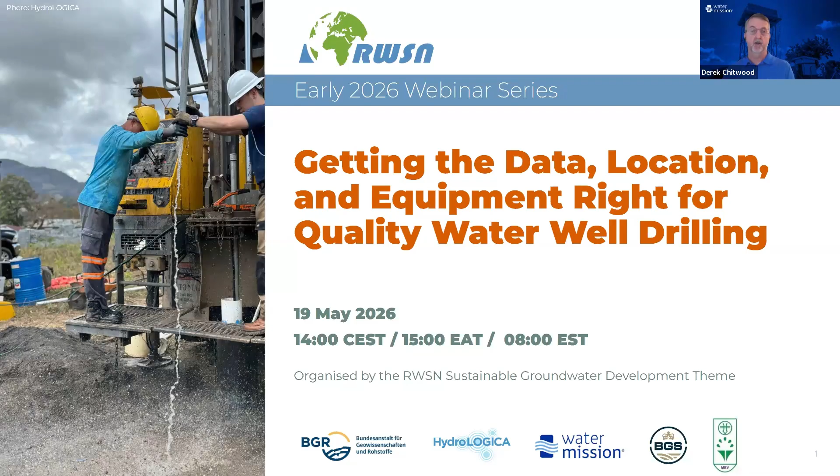In today's talk, we're going to be going over many of these details. The agenda today is that we're going to have opening remarks by Laura Holliday, and then two longer presentations, one by Dr. Martin Eduvie on borehole siting fundamentals, and then a second presentation by Brandon Stone entitled Choosing the Right Drilling Equipment. And then we're going to have some Q&A time, about 15 minutes of Q&A time before the closing remarks.

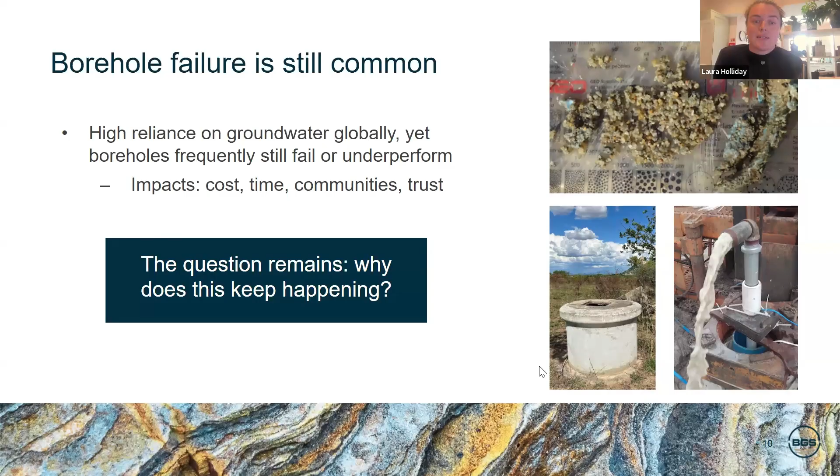In reality, borehole failure is not often caused by just one single issue. It's usually the result of multiple decisions made throughout the process. To start with, there's often a lack of data and understanding. Desk studies might be incomplete, and the data that is available might be low quality or misinterpreted. This means that decisions are being made without a clear understanding of the hydrogeological setting.

This then feeds through into improper siting and decision making, with locations often selected too quickly or based on limited information. In practice, siting should really combine multiple data sources. That might include field data collection, for example, geophysical surveying in more complex environments, but this doesn't always happen.

There's also challenges related to drilling and equipment, where equipment might not be suitable for the hydrogeological environment, and the quality of drilling equipment and borehole consumables can also vary quite significantly. At the same time, data collection during drilling might be poor or incomplete, and importantly, also borehole design isn't generally adapted to the site conditions, where the reality is that borehole design should be quite flexible, so we could be updating screened intervals based on what's actually encountered during the drilling process.

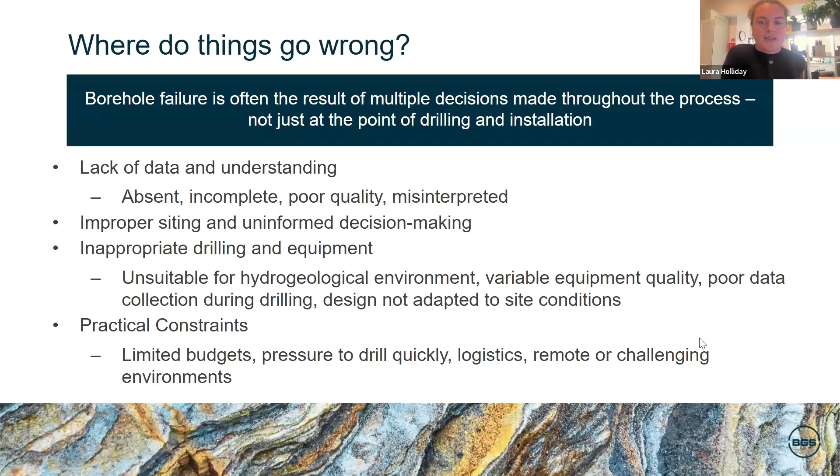Now we've looked at where things go wrong, we want to know what actually helps things to go right. The main message is fairly simple. Good siting, good design, and appropriate equipment leads to higher success rates and long-term sustainability.

Good siting and design means building a clear understanding of the hydrogeological context, using both desk studies and collecting new field data, and then combining these multiple sources of information. But it also means continuing to collect and use data during drilling and ensuring that the borehole design is site-specific and adaptable based on what's actually being encountered.

At the same time, appropriate equipment is not just about the drill rig, it includes the full construction process. This means using the right drilling method and suitable and well-maintained equipment to start with, but it also means selecting appropriate and good quality materials for installation within the borehole. So this might be the casing, the screens, the gravel packs, and even choosing the right pump.

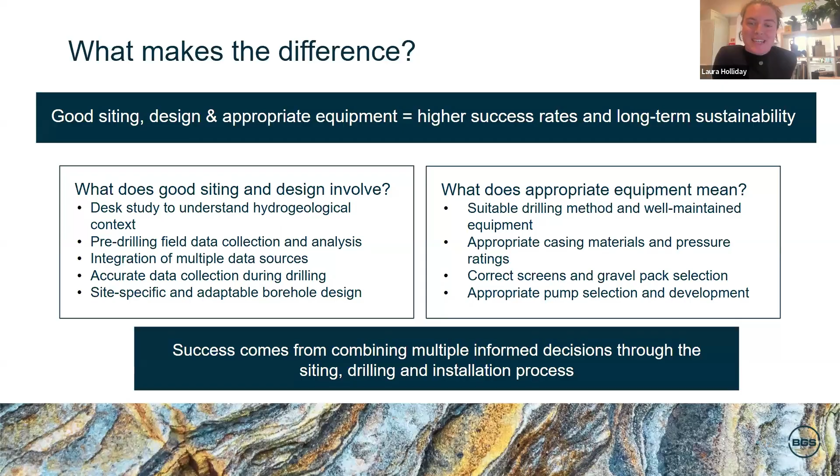So overall, we can see that success comes from combining multiple informed decisions throughout the siting, drilling, and installation process. Thank you for your time, and I will now hand you back over to Derek.

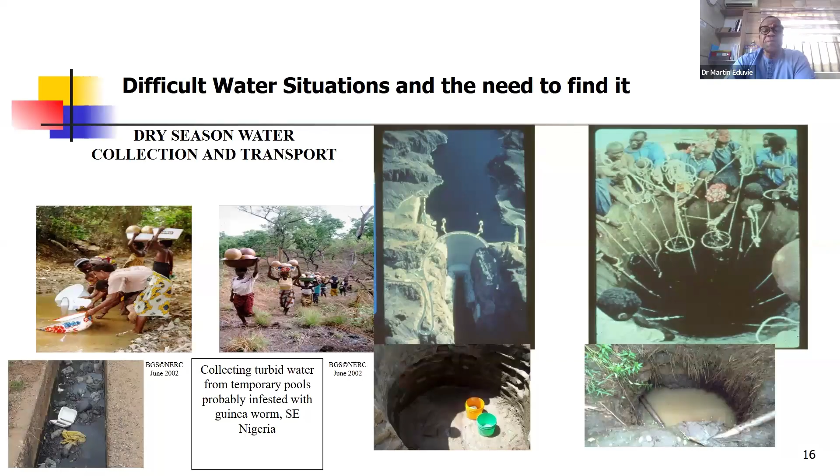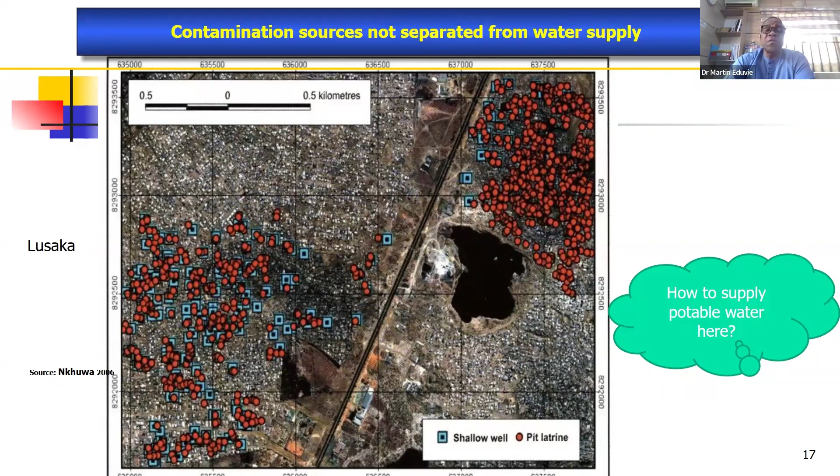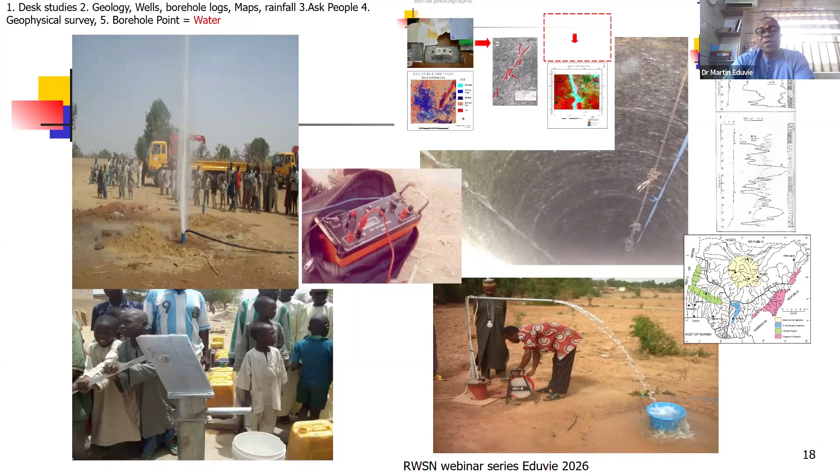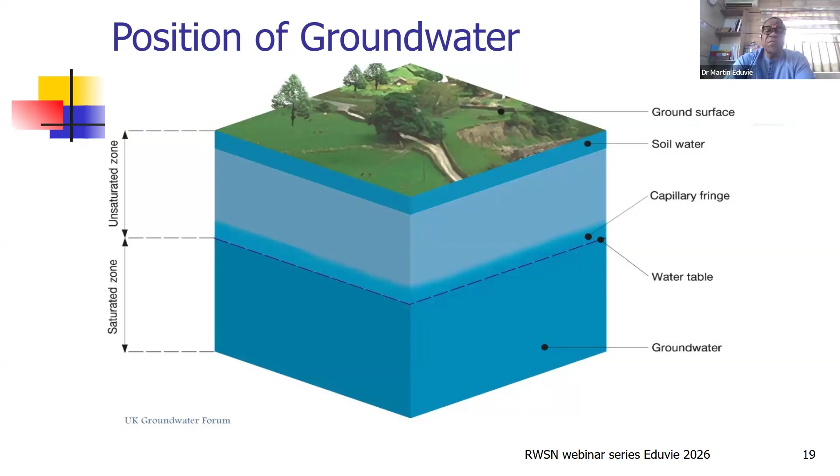What are we looking for? This is the position of groundwater. At the top of the surface there, you have everything that happens - your buildings, your recreational services, and all your development issues. Then just below that, you have the soil water that gives you the unsaturated zone until you meet the static water level before you get to the saturation after the water level.

The basic issues that are very important, especially in locating good areas for siting, is the geology itself, which I refer to as the main housing unit. Generally, you have the basement complex and the sedimentary environment. Most of the aquifers, which are normally the geological formations that can store and transmit this very scarce commodity, have, for example, fissures and cracks within the Precambrian basement complex. You also have some pore spaces within the sedimentary environment and a little bit of loose sand that are normally associated in flood plain areas, sometimes referred to as fadama.

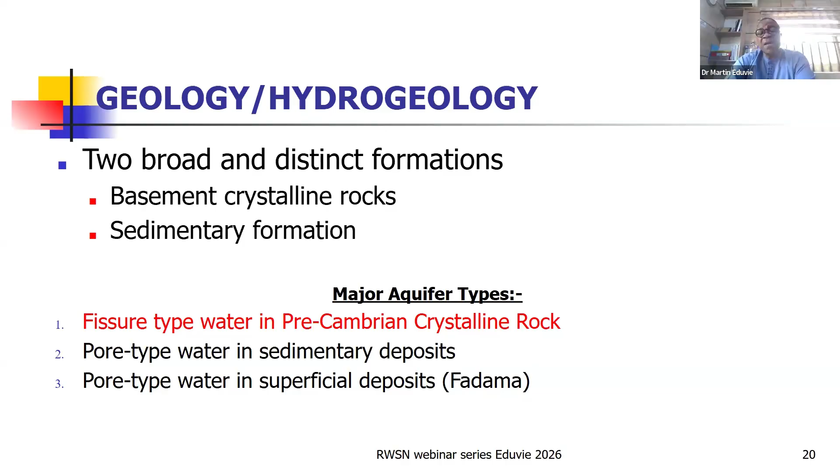Geologically speaking, the first one gives the unconsolidated pore spaces, followed by the fissured aquifers with the consolidated rocks. They are quite important, except there are fractures. Then, of course, you have what we call the karst aquifers. These are mainly silicified, calcite, for example in terms of limestone and, of course, dolomites - the calcium and, of course, the magnesium equivalent. And when there are fractures within this geological diversity, you have good aquifers.

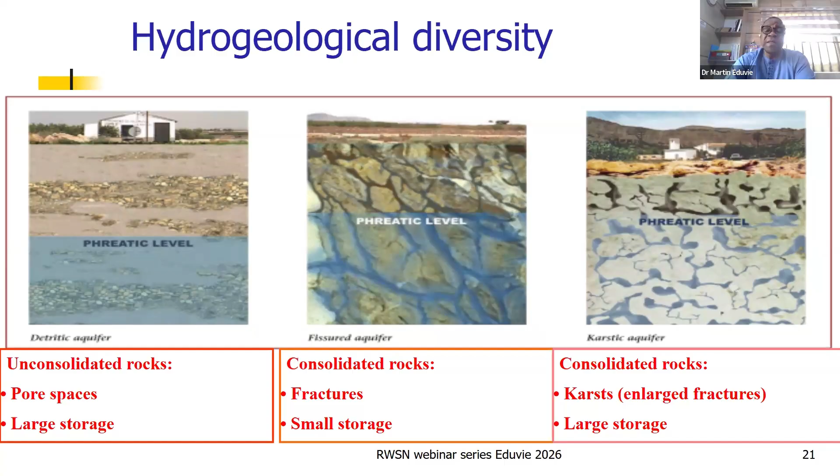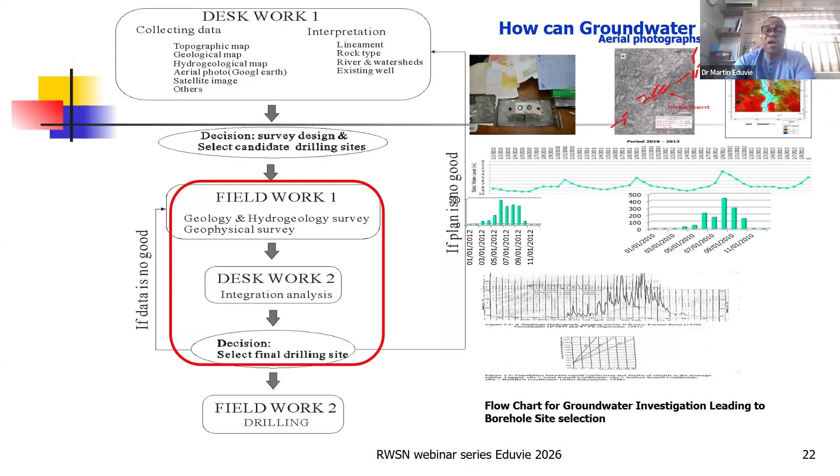Generally speaking, I've tried as much as possible to give the whole journey in a very good slide here. The first one talks about the desk study and, of course, the areas that are quite important, like the photo maps, the satellite, and, of course, most of the fractures. From there, you're moving into the field aspect of it that identifies streams, identifies rivers, identifies most of the aquifer itself, including hydrographs and, of course, rainfall data that can be used to interpret this, then followed up by geophysical interpretation. Right in the field, when you notice that there is good prospect for it, then you can go on to do the siting. But if you are not convinced, you might have to go back and do more studies.

The geological environment is very important. Giving an example of a geological environment in Nigeria, where you have the sedimentary environment, the basement complex, and of course the basement complex is mainly the granitic rock - for example the igneous and probably the metamorphic rocks. All these are subject to an increase in terms of fractures and cracks that we're able to kind of identify areas where there are fractures.

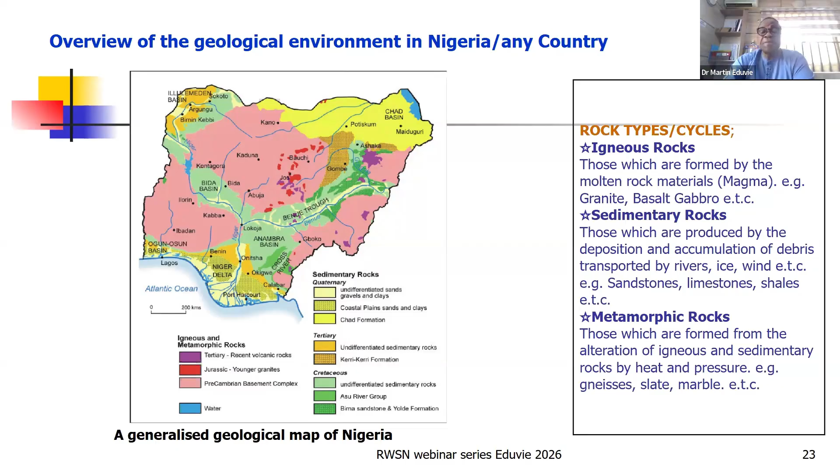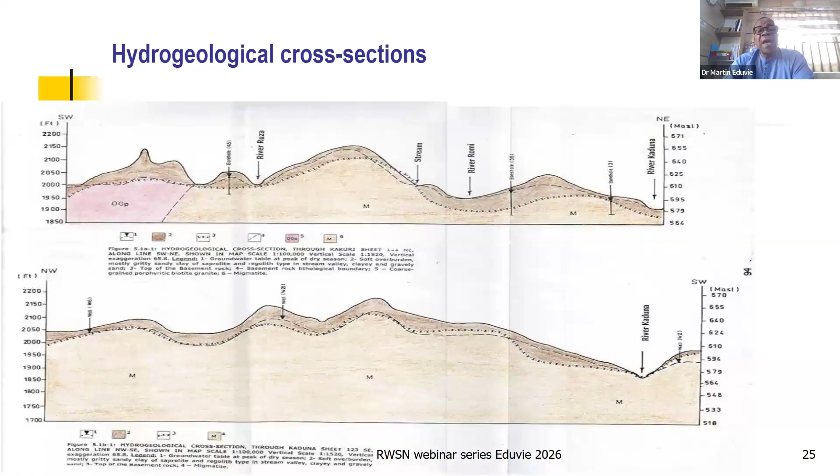Sometimes the geological map is looked at as not very important, but these are direct evidence that can give you the direction of flow of most of the rock unit. Next, you can go into the cross-sectional areas, which are very important because they directly identify areas that are fractured and areas without fractures. That's why it's important to have a good look at the hydrogeological section so we can identify areas to drill.

Now, the geophysical aspect is very important, and has always been very important. Having done your normal desk study, reconnaissance and field study, the next important aspect is to do the geophysics. This is the surface geophysics. Over the years, the electrical resistivity method, consisting mainly of constant separation traversing and vertical electrical sounding, has proven to be very reliable. You can use it to save cost - for example, you don't need to use electromagnetic methods. Instead, you can use horizontal profiling to do the same job.

I tried as much as possible to explain that when you have two electrodes driven into the ground, measuring the resistance, the difference in terms of apparent resistivity value is what gives you the value that helps identify areas to drill. For example, if you have a topography where one point is very high and one is very low, in between you can decide to have three vertical electrical soundings - at the highest point, the middle, and the low point. From there, you can use those values as your constant separation traversing to eliminate areas that are not quite productive.

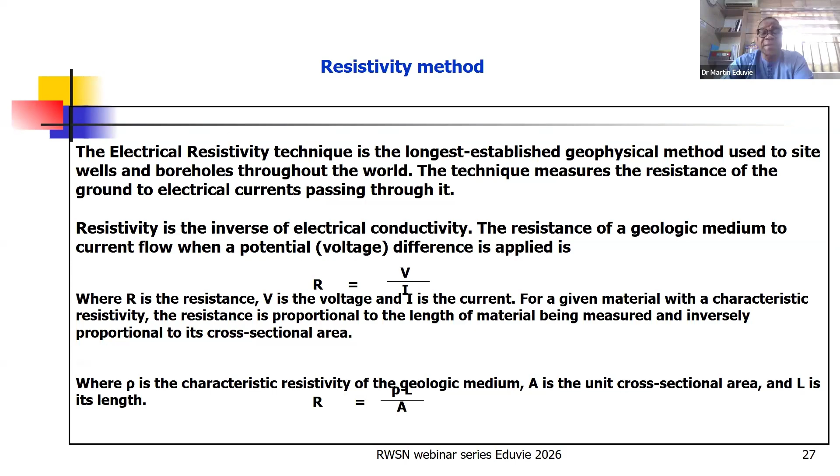These are just giving you the various configurations that we're able to use.

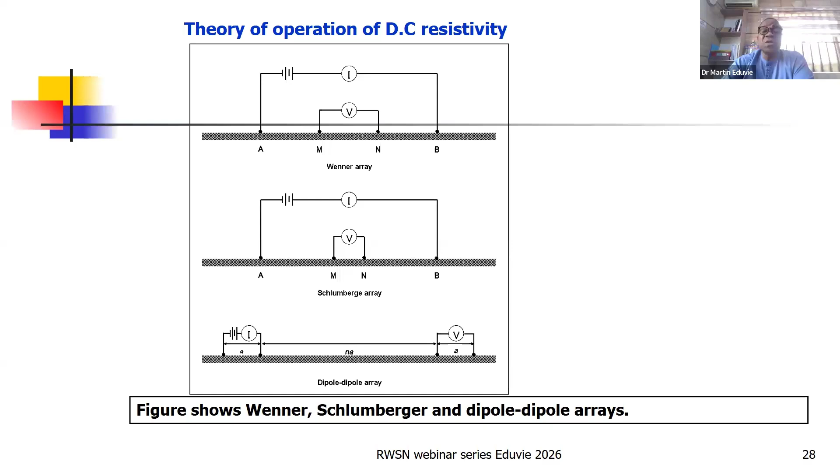Now, when you have the current on C1 and the potentials P1 and P2 kept constant, we use that as the Wenner array. This is very nice for constant separation traversing. While the Schlumberger array is used for vertical electrical sounding - the more you increase the length of AB over 2, the more result you get in terms of what is happening beneath the soil.

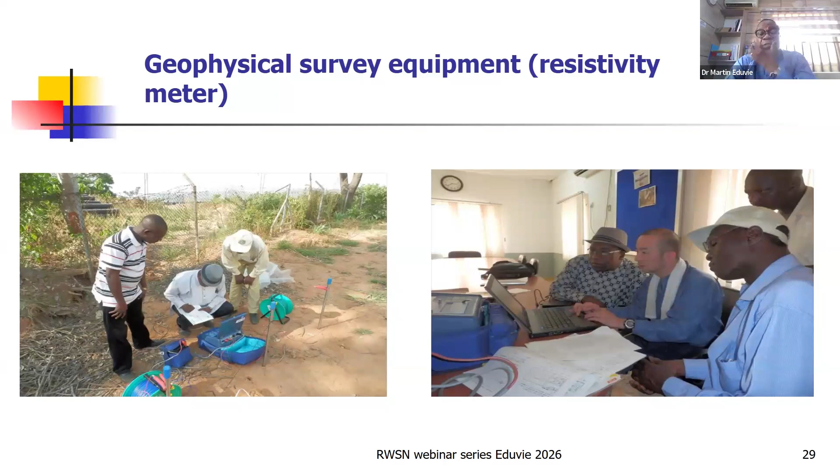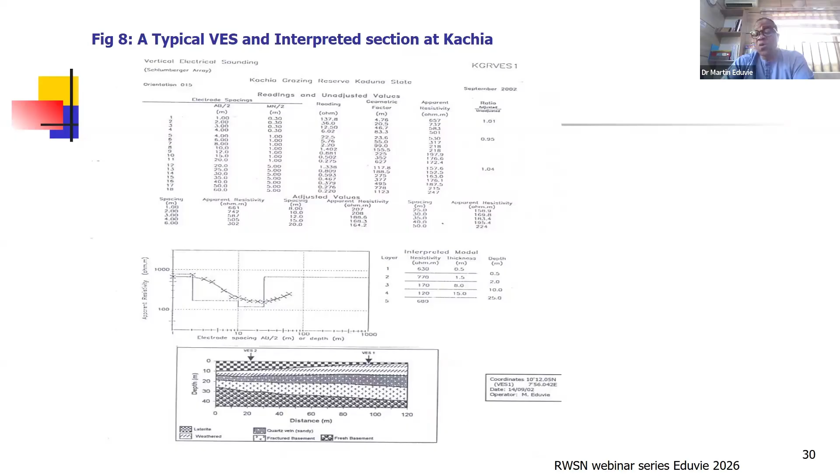After the modeling, for example, this is a typical H-type curve where the top of the curve is quite high - we refer to this as the upper resistivity, which is high because of the dry nature of the topsoil. As you keep drilling down, it becomes a bit moist, reducing the resistivity because it becomes more conductive, until you hit the basement, where it starts moving up again. Depending on the nature of the inclination as you move along, the percentage of inclination tells you whether there are fractures present or not within the area.

Now, this gives you the field interpretation of the resistivity in relation to the drilling you are supposed to do. Basically, this is a typical basement complex where the topsoil is quite dry with a lot of laterite, then it becomes sandy clay until you get to the transition zone, which is quite important in terms of aquifer, until you meet the basement. Only the basement will be useful for water if it is fractured.

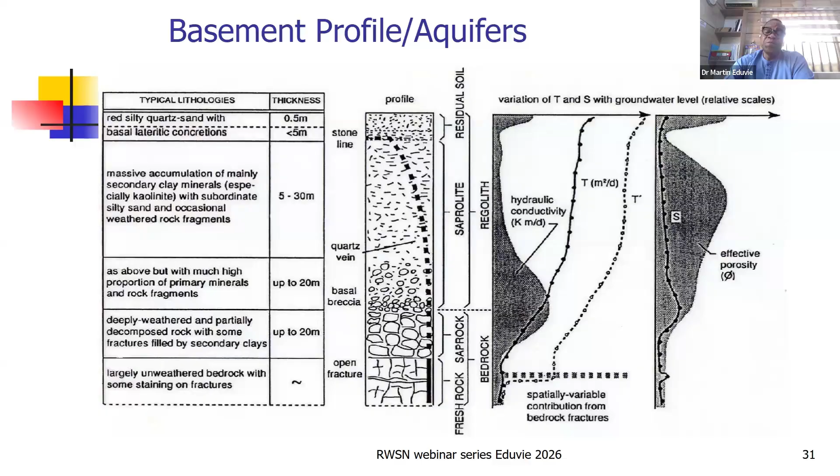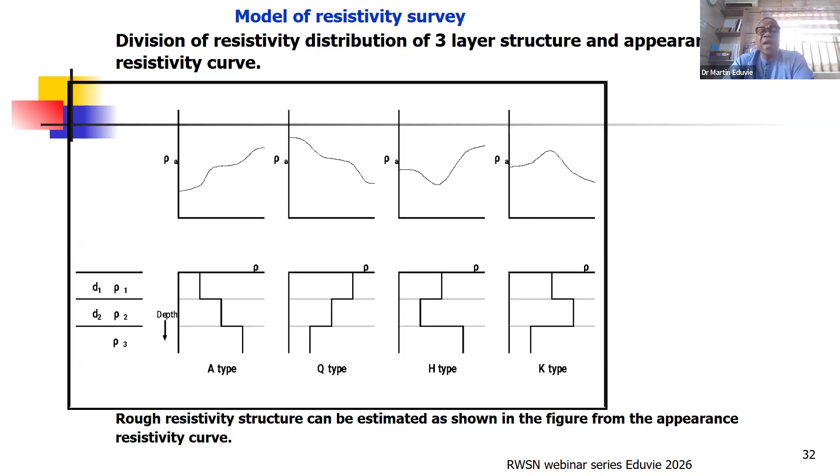This gives you a typical example of the most probable resistivity curves you are supposed to have - the A type, the Q type, the H type, and the K type. Most of the time, the topsoil here is quite high, as I mentioned, because the uppermost resistivity when heated by the sun becomes dry and very resistant, so the values are likely to be high. When it comes low, it means you have something like clay, until you hit the basement before it rises again. This gives you a typical example of the most likely curves you are supposed to encounter in those areas, and this can be very handy in terms of your interpretation.

This is also the modeling. For example, if you have quite a lot of different scenarios beneath the soil, you can use that interpreting in various ways. For example, the constant separation traverse in the resistivity Wenner array was used, and it can directly identify that in terms of the high value for resistivity, that's where you have the peak.

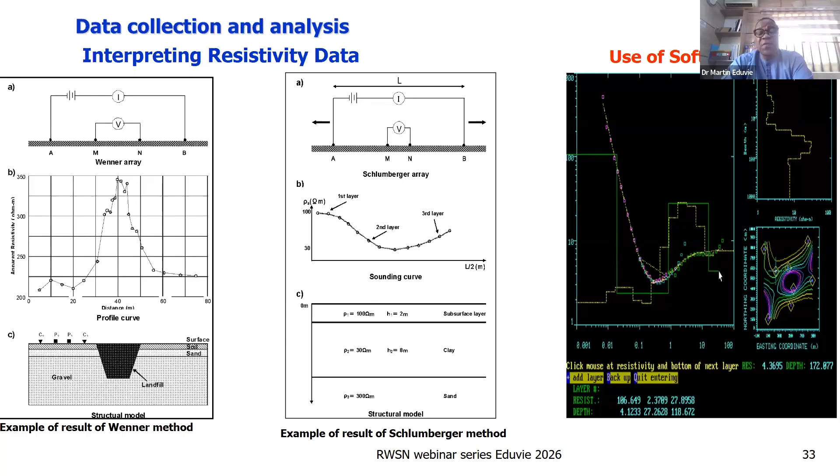The other gives you a typical example within the basement of an H-type curve, where the topsoil is quite high, and with a little bit of moisture, clay for example, it lowers the resistivity before it becomes high again. This gives you a type of modeling you can use in conjunction with the various logs you have during your desk studies. Next slide.

I've done quite a lot of series of work within this. In most of the works you have here, we are going to have about 4 more scenarios: the dry basement, for example, which is quite clear at the top, the weathered zone and the fresh. Sometimes the topsoil can also be brecciated, or sometimes with a lot of laterite, then you have the weathered zone, then the fresh.

Or you could have a very clean overburden, sometimes mixed up with a lot of boulders, then weathered basement, for example, and of course fresh basement with a lot of fractures.

The last series is what I refer to as the false basement. Sometimes you have the top resistance, it becomes a little bit weathered, and you think you're already in the basement, the hard rock. Then by the time you case the temporary casing and decide to introduce your hammer, you find that it grinds it down and looks as if you are back to the weathered zone of the basement complex.

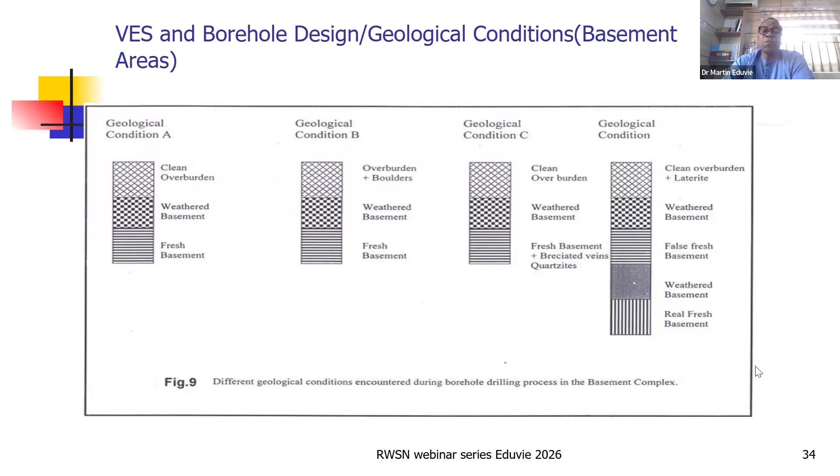This is giving you a false basement, what I call the false basement. So you need to return and remove all those temporary casings and drill down again before you can get a hard basement. This is very important. This has resulted in a lot of abandoned wells, abandoned boreholes in most instances. Next slide.

Now this gives you an example of different interpretations of vertical electrical sounding with logs, and gives you some models to correlate what you have in the vertical electrical sounding with how they correlate with the drilling that you have. Next slide.

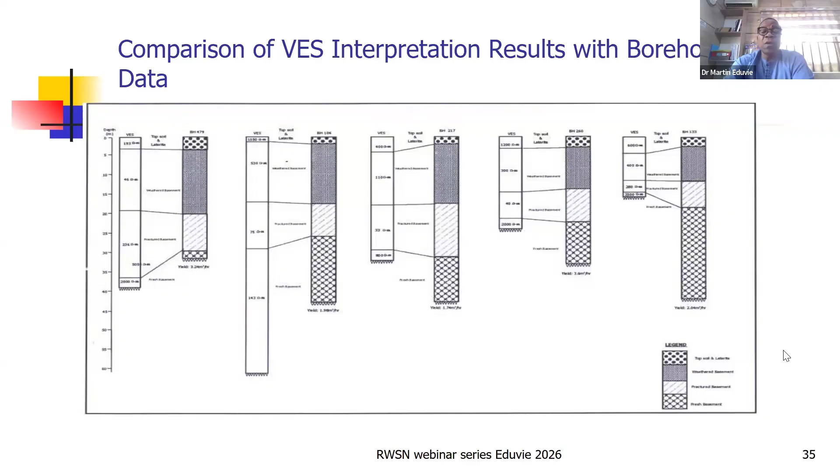This also gives you a typical summary of what you have. So if you have, for example, the desk studies, your reconnaissance added with the resistivity value, of course with good drilling, that gives you the result of a good aquifer system and a good borehole. Next slide.

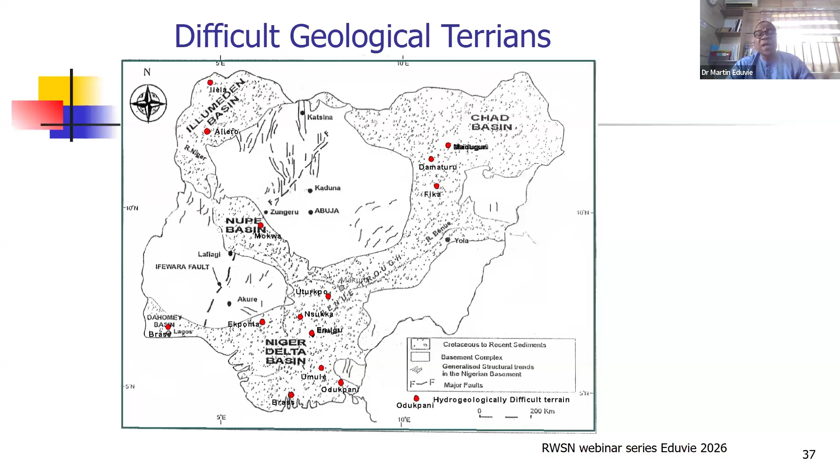Sometimes it's good for you to have an idea of the difficult areas, so that anytime you are planning for a good site to bore, it gives you an idea so that most of your reconnaissance and fieldwork will be based on the areas you are working on. This gives a kind of advantage over others, especially if you do not have much data. Next slide.

Now, what are the basic reasons when we try to summarize this? Less attention and low investment is normally given to the study and investigation stage. This has resulted in very unproductive wells, geological and hydrogeological difficult areas, as I've just mentioned in the last slide, and a lack of hydrogeological maps, satellite images, and software to be able to interpret this.

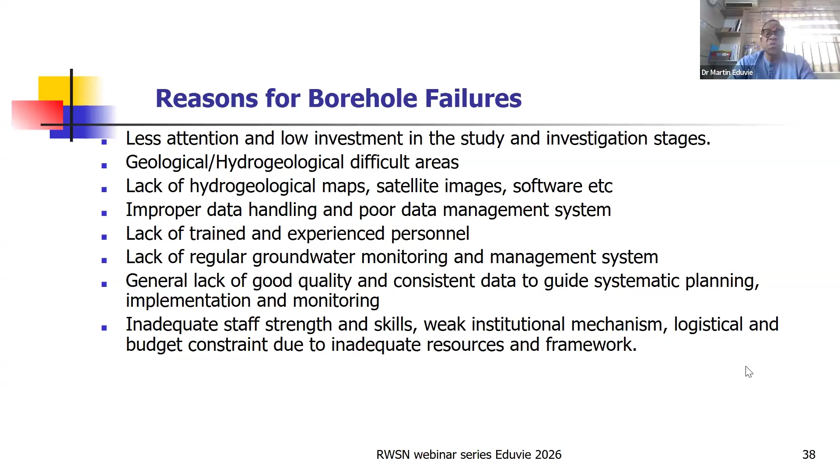There's improper data handling because people don't have good skills, experienced field people that can help you interpret data. There's a lack of regular groundwater monitoring and management systems, and generally bad quality of water, and even in terms of the data that you have. This will normally help you if you have good quality data in planning, implementation, and monitoring. Of course, institutional mechanisms are very important for you to be able to do all this. Next slide.

Conclusion and recommendations. For you to have an excellent result, there's a need to understand groundwater in terms of the exploration, which is the general ones I've given to you in terms of desk study, reconnaissance, and fieldwork. Then the method of the exploration and the management.

Conduct good geological and hydrogeological studies, both within surface investigations and also the best site for the survey, drill pilot hole, especially for very good projects that involve a lot of boreholes. And of course, you drill and do a lot of geophysical logging to tie most of what you have at the surface with what you're having. This will give you more confidence in terms of location of the groundwater system.

Using, for example, the electric logging, which is the spontaneous potential and the point resistivity, using caliper to be able to notice where you have cracks or loose sand, and of course the gamma log that differentiates between clay and sandy formation.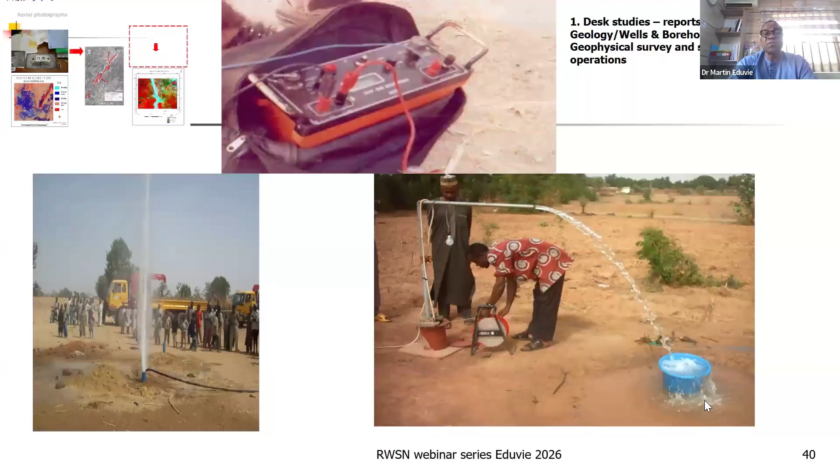At the end of the day, sometimes you are sitting or standing on a solution, but because you have not taken your time to find out what it is in that place, what are the things that are required, what are the tools for you to be able to do it. It's normally important for you to find it so that you can use it to achieve your result.

Thank you very much for listening. I hope that if you endeavor to adhere strictly to this, you should be able to have a good well at the end of the day. Thank you very much.

Thank you so much, Dr. Eduvie. Excellent. Really appreciate the talk and for allowing us to understand that siting is very complicated. It's not just one point of data and then we move on, but it's really a synthesis of so much work that has to go together.

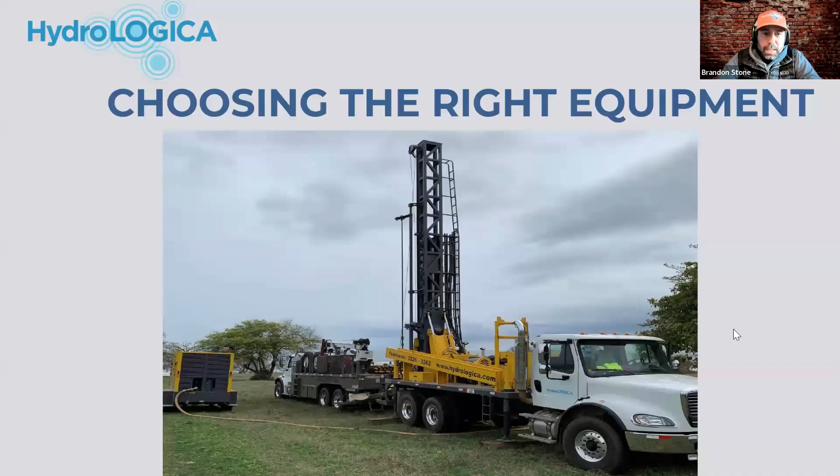Hey, good morning, good afternoon, good evening everybody. Like Derek said, we provide training and consulting across Latin America and Africa, and we also have a full drilling operation in Nicaragua, so hopefully we're talking from a position of experience. This is some of the equipment we've got down in Nicaragua. This morning I'm going to talk to you guys about how to choose the right equipment.

Matching equipment to the geological conditions is super important. In geology, as I'm sure Dr. Martin can tell you, it gets really complicated. From a drilling perspective, it gets a lot easier - we've got hard rocks and soft rocks, swelling clays too, but ultimately the geology dictates our drilling method.

Our borehole diameter plays a huge role in the type of tooling and the size of equipment that we need, as well as the depth of the borehole. We can gain a lot of that information from a proper desk study and from a proper hydrogeological assessment.

If we just show up to a location with no previous studies, no information, or previous drilling experience there, we're not really sure what's down below us, and understanding what drilling methodology we'd like to use can be nebulous. So this information is important, and when you're contracting out drillers, you want to send out all of the studies and information you have so those drillers can make an informed decision as to whether or not they're qualified to drill that well.

The specifications for the borehole and all of those studies should be made available to the potential contractors.

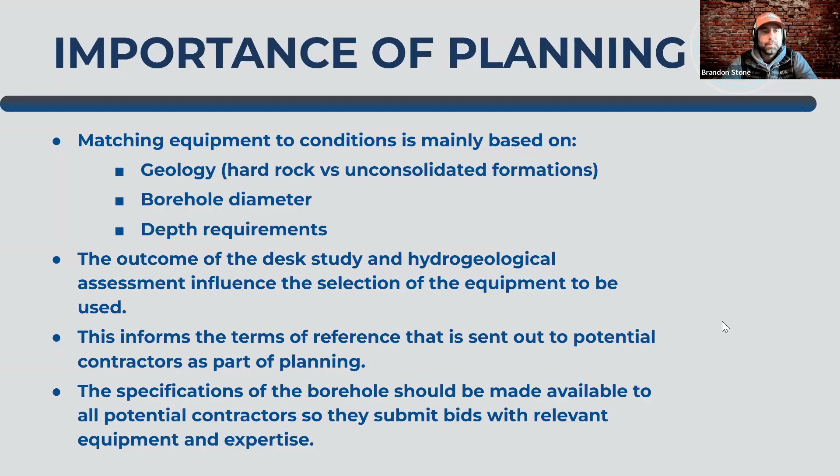And in each one of those different activities, you need qualified and trained personnel, and they need to have the necessary and correct equipment. Then you need to have a supply chain that supports the spare parts, materials, and supplies for that. Today we're going to talk about the drilling the well part and the necessary equipment related to that.

It's worth noting that you could have the best equipment in the world, brand new equipment, but if you don't have a competent driller operating that equipment, it's almost completely useless. I'd rather have an older drill rig with a competent driller any day of the week rather than a brand new shiny drill rig. We're actually dealing with that situation right now.

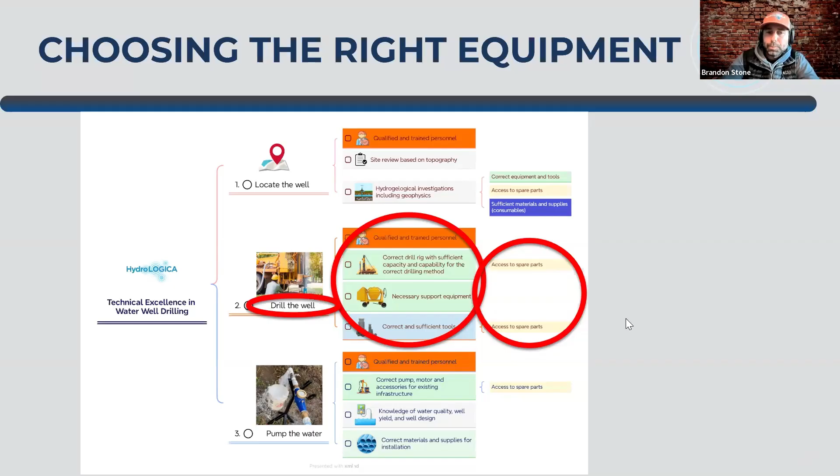There are different equipment, and that specific equipment is specific for different drilling contexts. I'm just going to touch on the most common drilling methodologies: there's mud rotary, air rotary which also includes downhole hammers, it can include foam drilling, and then the oldest drilling method out there are cable tools, which is percussion drilling. In some parts of the world, manual drilling is also a viable option.

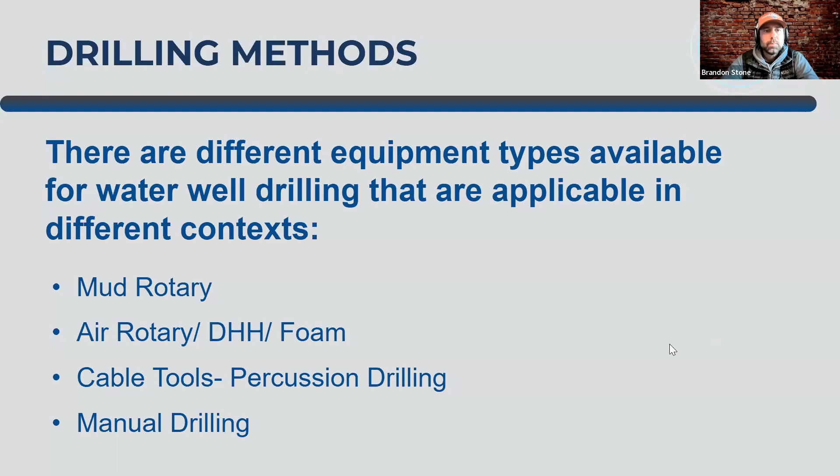One thing we want to do before we contract a driller is assess the driller's ability to drill that borehole. So when we put out a bid for a well and get bids back from drilling contractors, we want to go and review their equipment and confirm that it has the capacity to do what we need for that specific borehole. We want to consider the capacities not only of the main equipment, but also the ancillary equipment - the drill rigs, the compressors, and the mud pumps.

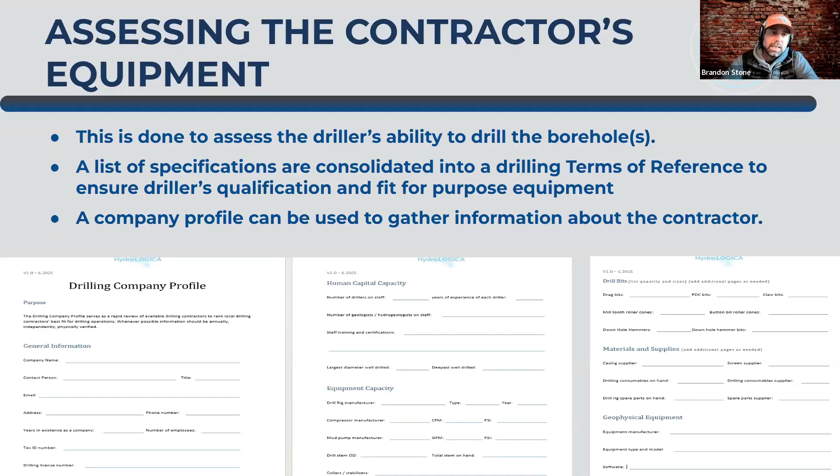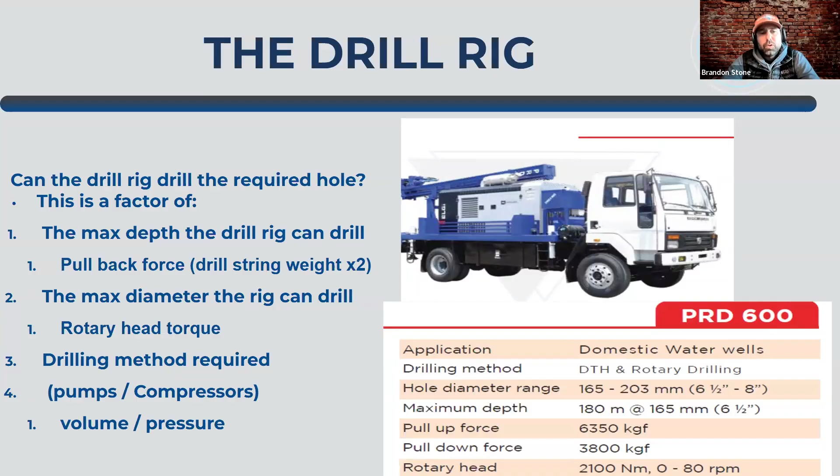So the drill rig itself, most rigs manufactured by a reputable driller will have published capacities. Most drill rigs' capacity specifically will include the pullback force, or the capacity to pull things out of the hole, which is directly related to how deep that drill rig can drill. And then they'll talk about the rotary head torque, which is directly related to the drill rig's capacity to drill larger diameter holes.

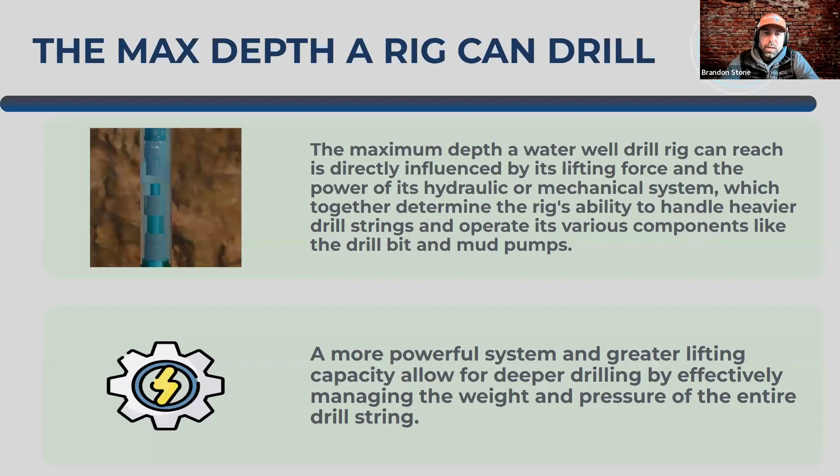So people often ask, how deep can that drill rig drill? The answer depends on how much pullback force it has. That force is related to the hydraulic capacity of the drill rig to move up and down, but more specifically, the capacity to pull weight out of that hole. That weight ultimately is the entire drill string, drill collars sometimes, and then the drill bits. You never want to max out a drill rig's pullback capacity. Usually you want to use about 50% of it at total depth.

The diameter of the well is in part directly related to the drill rig's torque, which is the top head torque, or table rig torque. The drill rig's capacity to turn that drill bit and the entire drill string is related to that top head torque. So the more torque it has, the larger bit it can turn successfully, and by extension, a larger diameter well it can drill.

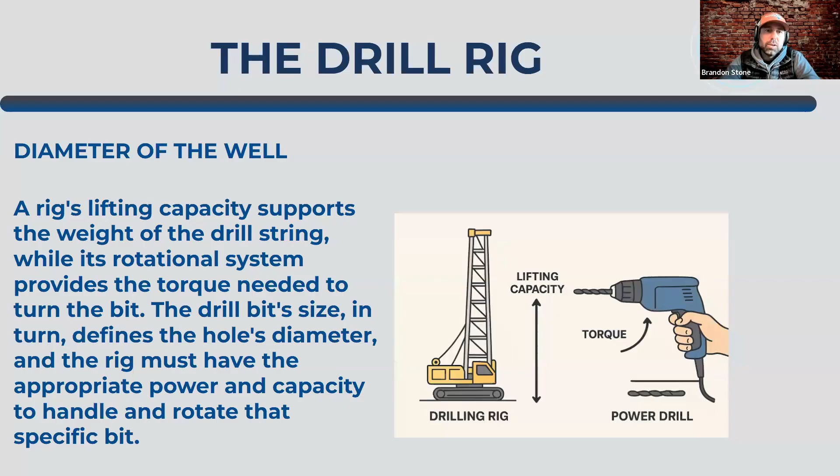And again, all of this can be found either from the drill rig manufacturer, or oftentimes it's printed right on a plate on the drill rig, and we will go out and actually look at that and verify those specifications.

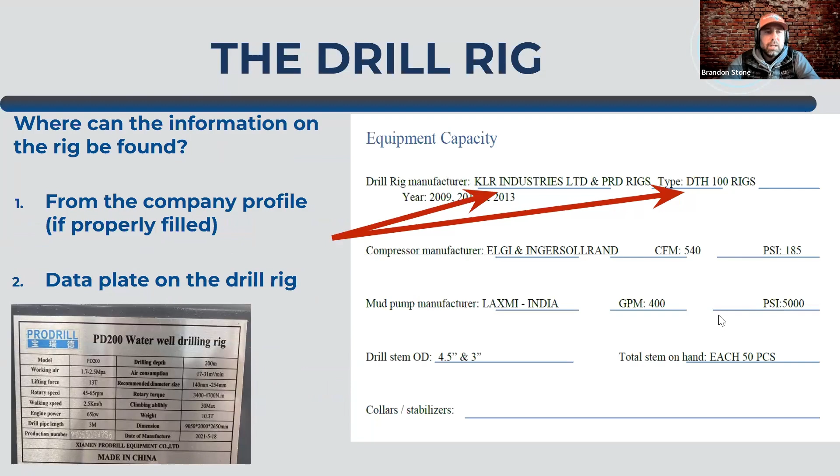There are different rig types, and we talked about those briefly. But if we want to mud drill, we want to make sure we have a drill rig that has a mud pump, or that they bring on an on-site mud pump. The same is true with an air compressor if we want to drill air.

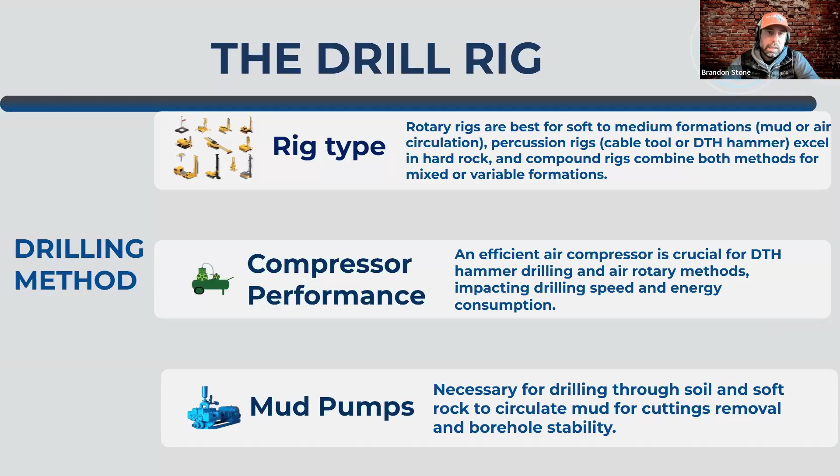Air compressors are obviously for air drilling, but just like drill rigs, they come in a lot of different sizes. Both air compressors and mud pumps, we want to think about volume and pressure. Can the compressor lift the cuttings out of the annular space all the way to the surface? The larger diameter hole we drill, the more air volume we need to push all of those cuttings up. And the pressure the compressor exerts is specifically related to hammers. When we're air drilling with hammers, they need a specific amount of pressure to actuate the pistons and function the hammers. As we drill deeper, we need more pressure to overcome friction losses as we come up the hole.

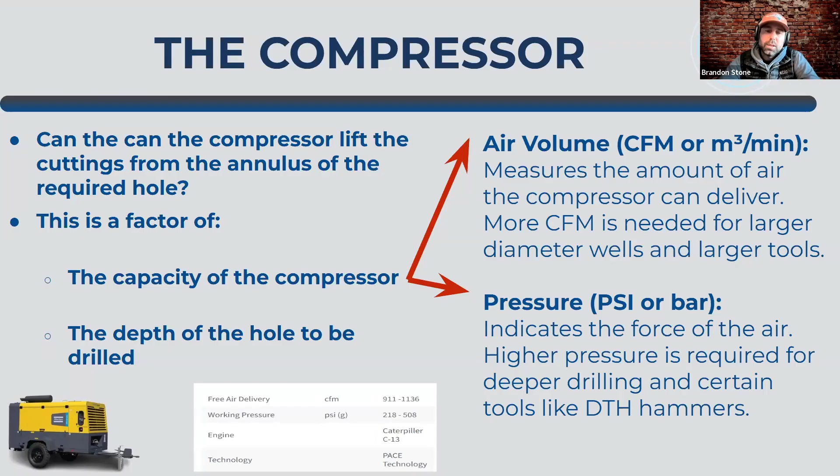I'll spare you guys the math on that, but you can find it out. We like to recommend an industry best practice of a minimum of 3,000 feet per minute annular velocity for dry air drilling. That converts down to different CFMs at different hole diameters. A lot of you guys drill 8-inch holes - you're going to need about a 950 CFM compressor to drill that safely. A lot of people drill larger diameter holes with undersized compressors, and you'll get this: 'hey, the hole's collapsing.' No, the hole's not collapsing - there's not sufficient volume to push all of those cuttings out of the hole. So as the holes get bigger, we need a lot more air, or we can turn to foam drilling, which is not something we're going to talk about here, but there are methodologies for doing that. The big takeaway here is we want you guys to understand that the larger diameter you have, the bigger compressor you need.

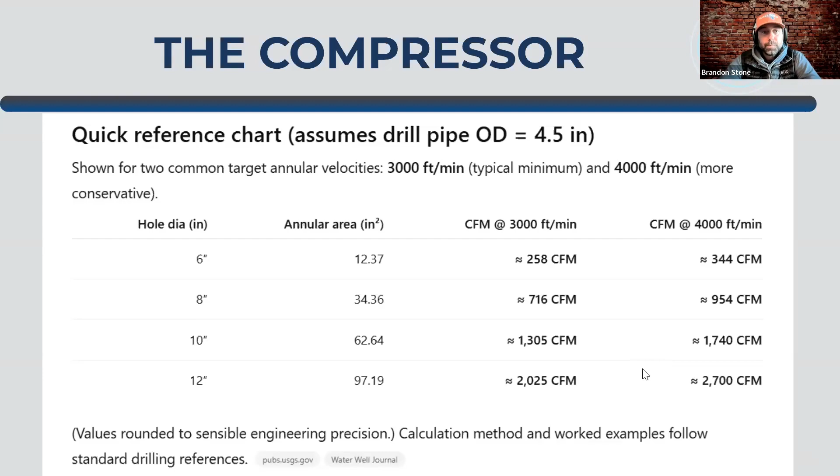A similar sizing is true for mud pumps and mud drilling. The question is, can the mud pump supply the required volume to get the cuttings out of the hole? Again, this is a matter of volume and pressure. All mud pumps should have both a volume and a pressure rating.

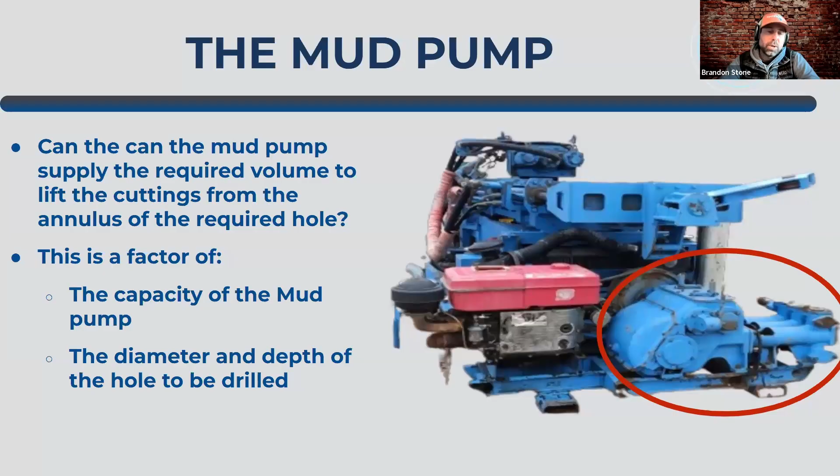So just like a compressor, the volume is directly related to the diameter of the well. Large diameter wells, certainly 14 inches and up, are typically drilled with mud because it's not economically feasible to put that many compressors in parallel.

Typically large diameter holes are drilled with centrifugal mud pumps, and deep wells are drilled with piston mud pumps. That's because centrifugal mud pumps can generate high volumes, and piston mud pumps can generate high pressures. So the larger the diameter of the hole is, the larger the mud pump we want, so that we can lift all of those cuttings and that entire column of mud out of the hole.

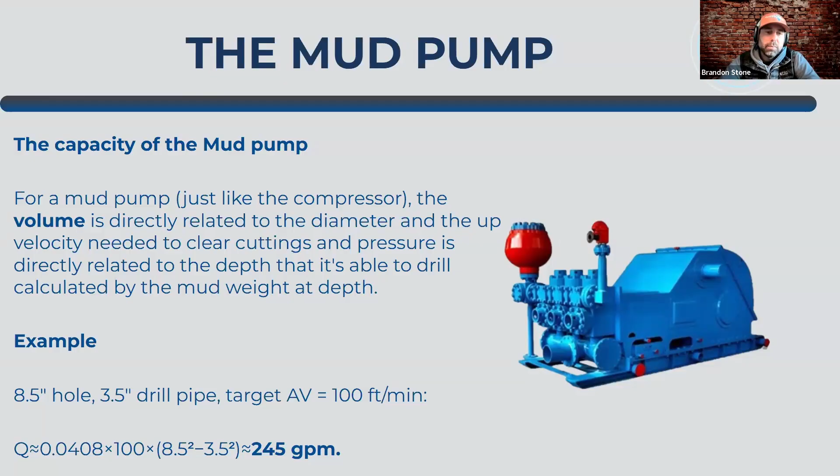The deeper we go, we're going to need more pressure, and that pressure is directly related to being able to push up all of the cuttings and all of that mud out of the hole.

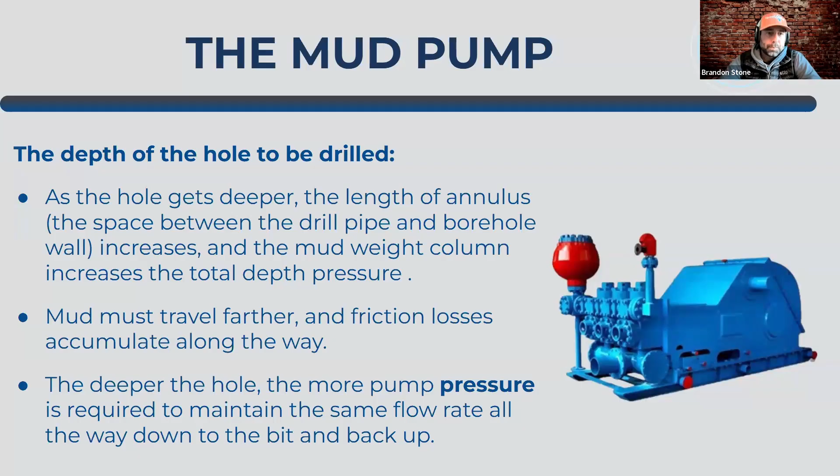This is a reality in all the countries we work in: adapting in constrained environments. In a perfect world, we would have all of the different equipment options and drilling methodology options, but that's not always true. So we're always faced by constraints, and the budget is below the cost of using the ideal equipment. You need to make sure your budget is appropriate for the type of well you're wanting to drill and the geological environment you're trying to drill in.

You need to determine whether or not the required equipment is available in your context and in your specific country. And then oftentimes we want to try to validate the experience and expertise of the drilling company and the drillers with that specific drilling methodology. Unfortunately, oftentimes the ideal equipment is not always available in the countries that we're working with.

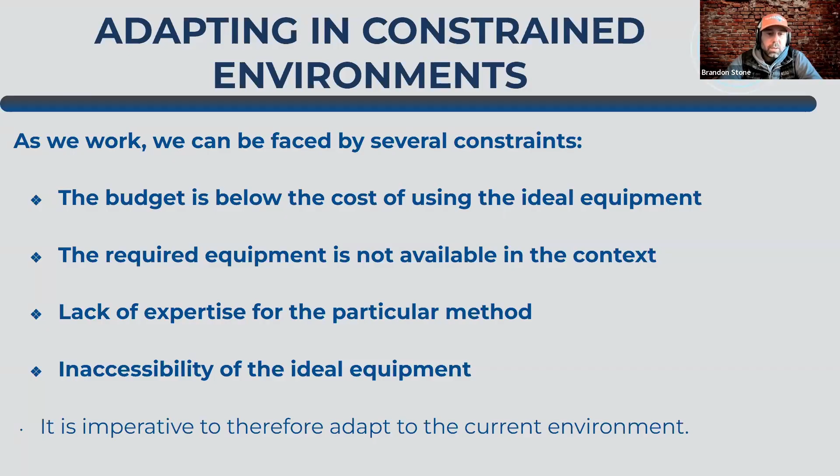Here are some practical solutions that we often recommend. If you can't find the equipment you were looking for the borehole that you had spec'd out, oftentimes reducing the diameter of the hole and the casing will get you into the range where the equipment available in your context can actually drill that.

Another practical solution is researching successful previous drilling under similar conditions and using that equipment and methodology. When we're out drilling, it's not like taking a university exam — we get to cheat and try to copy what other people did. So as a driller, if I'm going in to drill a new area, I oftentimes want to find somebody who's already drilled there and simply ask, what did you do? How did it go? Did it work? And then adapt our drilling methodology to what worked for them.

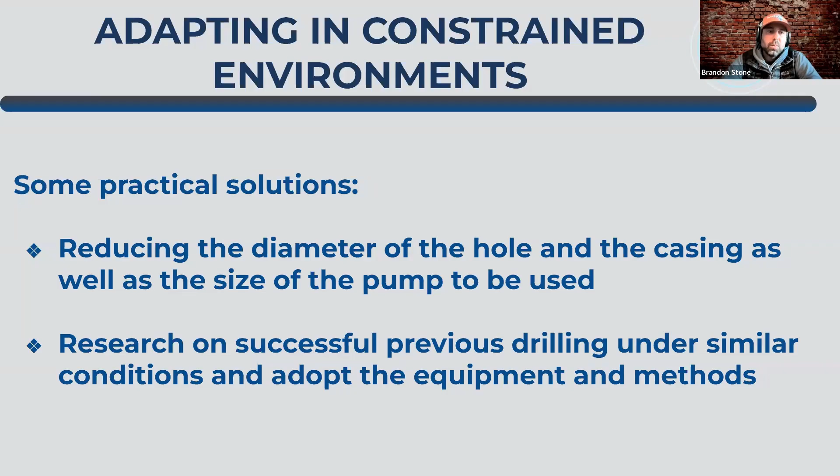When proper selection is ignored or overlooked, there are risks, and this is what we often find with the consulting work that we do. We get boreholes collapsing — which is sometimes an actual borehole collapse, and oftentimes is just cuttings falling back into the annular space because the mud pump or the air compressor wasn't sufficiently sized to clear the hole.

We could have reduced borehole yields because we weren't able to fully penetrate the aquifer with the existing equipment we had. We'll have failed drilling attempts because we're not able to drill the geology with the equipment and drilling methods available. And then we can have delayed project completions, often associated with poor or poorly maintained drilling equipment, and increased project costs because we're continuing to mobilize more and more assets onto a drill site because we didn't fully understand what we were trying to do out there.

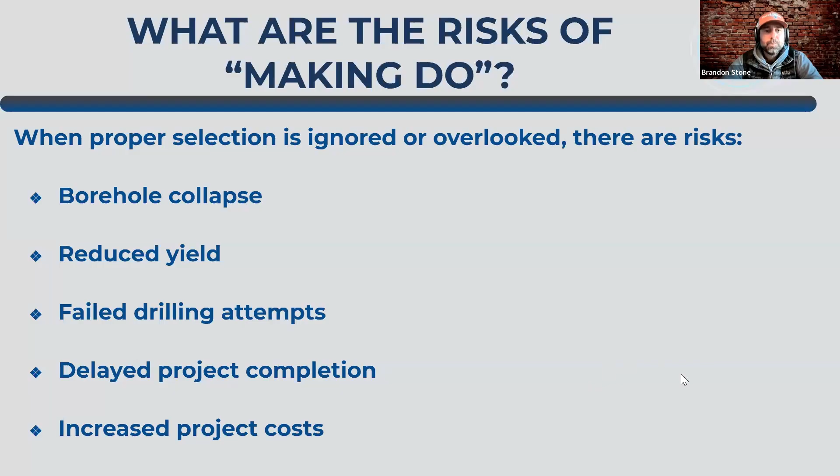These are technical decisions, and this was an extremely oversimplified presentation, as was Dr. Martin's as well. But a successful borehole always starts before the first turn of the bit. So equipment selection is not just what's available on site, but it's based on calculations and understanding what we're going to drill — depth, diameter, and drilling methodology.

It's about understanding the geology that we intend to drill through. That means oftentimes if we're going to drill through a lot of overburden before we hit basement rock or hard rock, we might mud drill that top part, case it out, seal it, and then go back in and air drill it because we understand the geology. Ultimately, it's based on the type of borehole we need. Is this a borehole for a hand pump, or is this a borehole for a municipal water supply? Those will have very different borehole designs, and by extension, very different equipment needs.

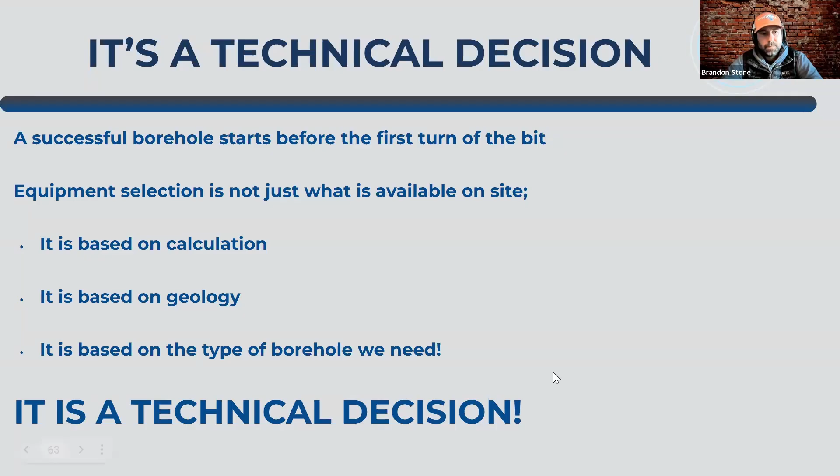That's it. That's what I got for you guys. Thank you for listening to me.

Thank you, Brandon. Love your talk and just very, very practical. Greatly appreciate it.